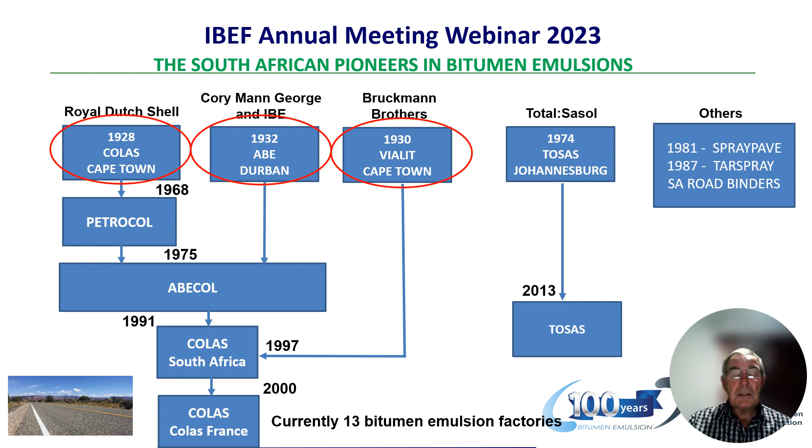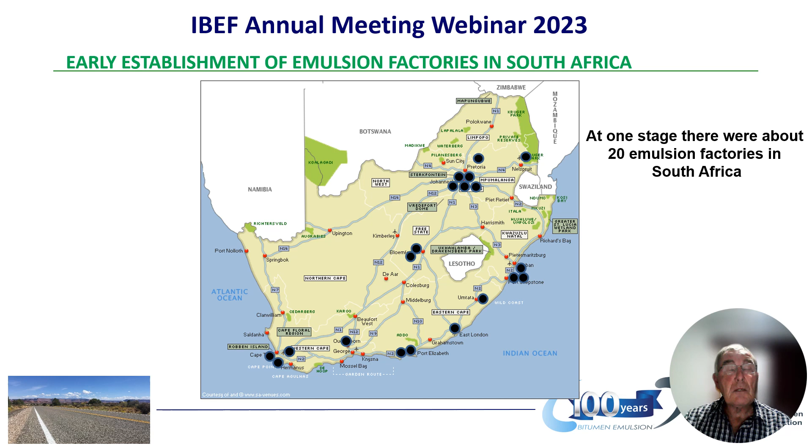After the first three factories were erected in Cape Town and Durban, a number of other factories were soon erected in the rest of the country. At one stage, there were about 20 emulsion factories in South Africa.

In the early days of emulsion manufacturing in South Africa, bitumen was imported in drums. The first crude oil refinery was only built in 1954 by Mobil in Durban. Shell and BP built a second refinery in Durban in 1962. This was followed by Caltex in Cape Town in 1966 and National Refineries, or NATREF, at Sasolburg near Johannesburg in 1971.

Unfortunately, the first two refineries ceased operations in the last three years. The refinery in Cape Town has also not produced any bitumen in the last number of years. The only supplier of bitumen currently in South Africa is thus NATREF. The country is thus largely dependent on the importation of bitumen for its requirements.

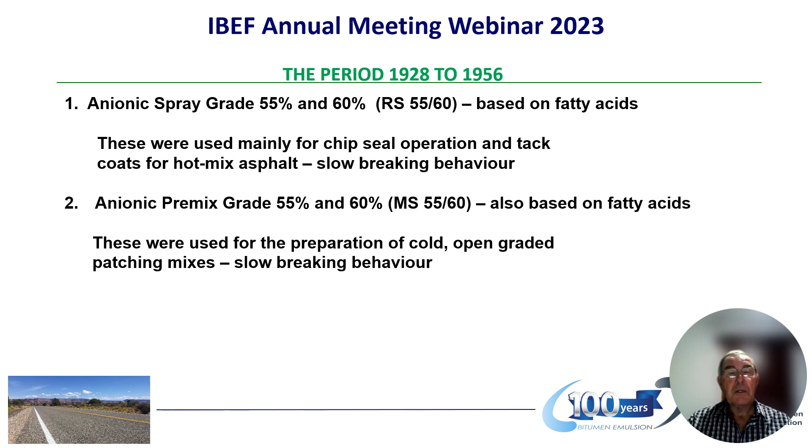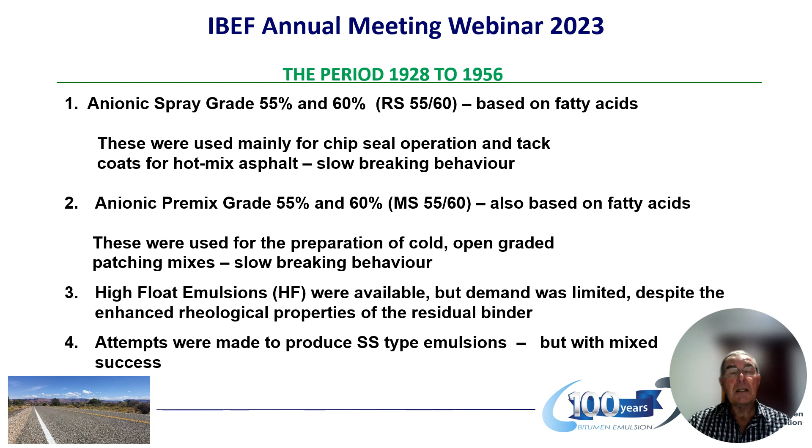The second grade that was produced was anionic premix grade, also called the MS grade, also based on long-chain fatty acids. These emulsions were used for preparation of cold, open-graded patching mixes, but unfortunately they were also slow breaking in behavior. High-float emulsions were available, but demand was very limited, despite the enhanced rheological properties of the residual binder. Various attempts were made in the early days to produce SS type emulsions, but with mixed success.

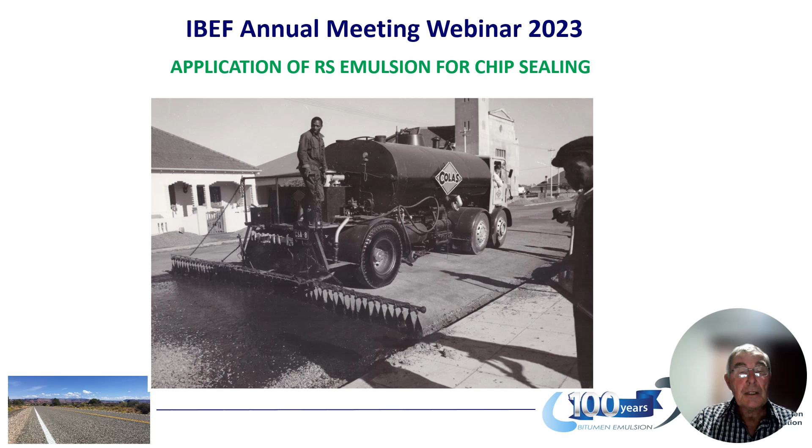A chip and spray operation taking place with the early anionic emulsions. Another old historical picture where RS emulsions are being sprayed for chip and spray application.

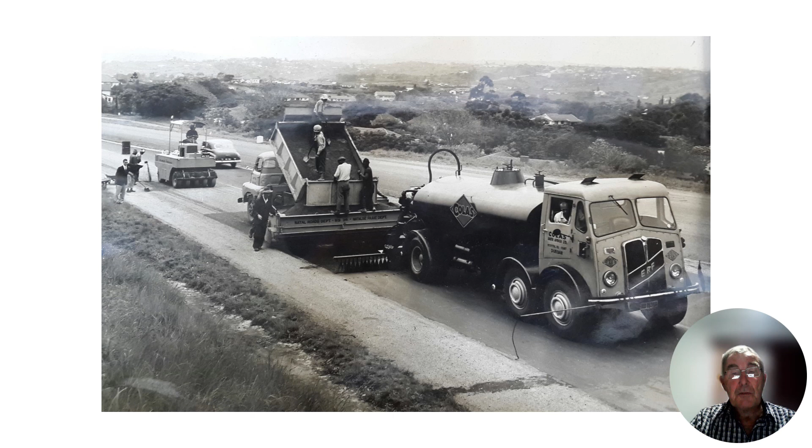These early anionic emulsions were not without their problems. The main problem was that it was slow setting during lower temperature conditions. Also poor adhesion with difficult aggregates such as quartzites and granites, especially during prolonged wet conditions. Also, it was difficult to dilute these emulsions with hard water, especially for fog spray applications, as it would block the tanks and the nozzles.

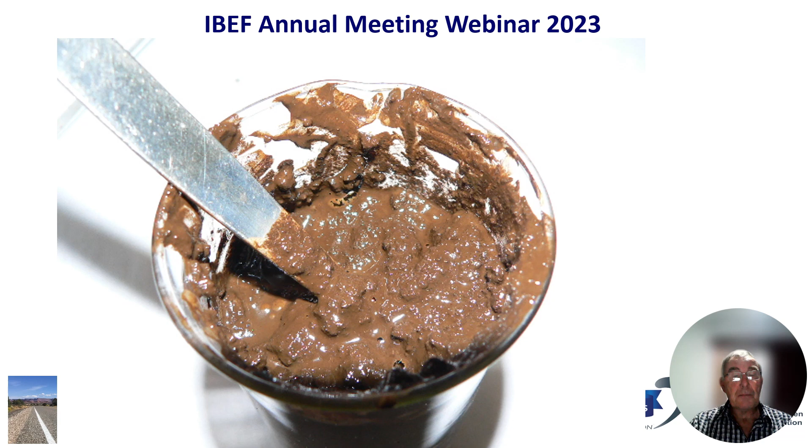It was also difficult to clean or rinse the equipment with hard water, as it would cause lumps. And these emulsions, of course, couldn't mix with fine-graded materials. This is a typical example of what happens if hard water is mixed with these early anionic emulsions.

The period 1956 to 1960 was indeed a landmark period for the emulsion industry, both here and abroad. Long-chain amines and diamines became available to the bitumen emulsion industry. It was now possible to produce CRS and CMS cationic emulsions, and that was the end of adhesion problems with difficult aggregates.

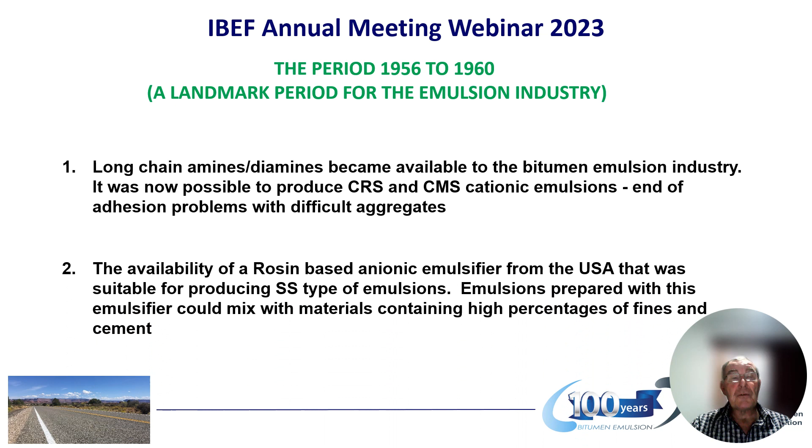Another breakthrough was the availability of a rosin-based anionic emulsifier from the USA that was suitable for producing SS type emulsions. Emulsions prepared with this emulsifier could mix with fine-graded materials and even with Portland cement. This was indeed the birth of the slurry era.

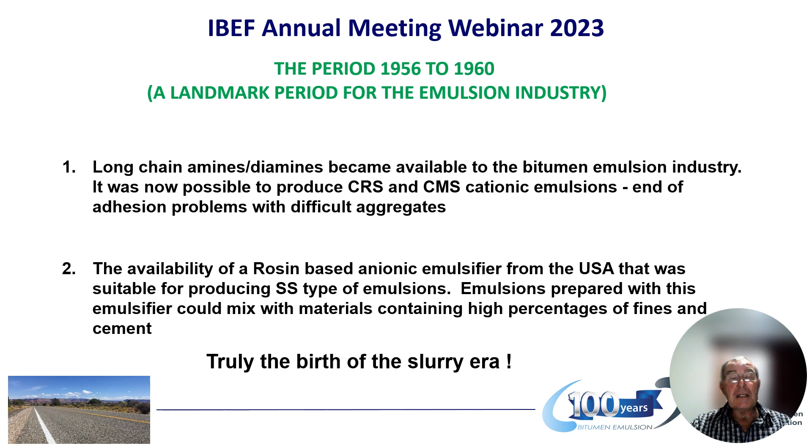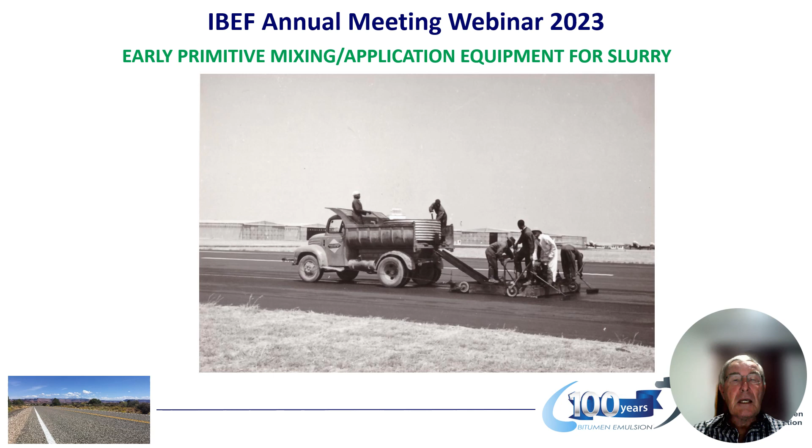Slurry soon became very popular. The early contractors were very innovative in the mixing and placing of this new product. This contractor was a bit more sophisticated, and he added a concrete mixer on the back of the truck.

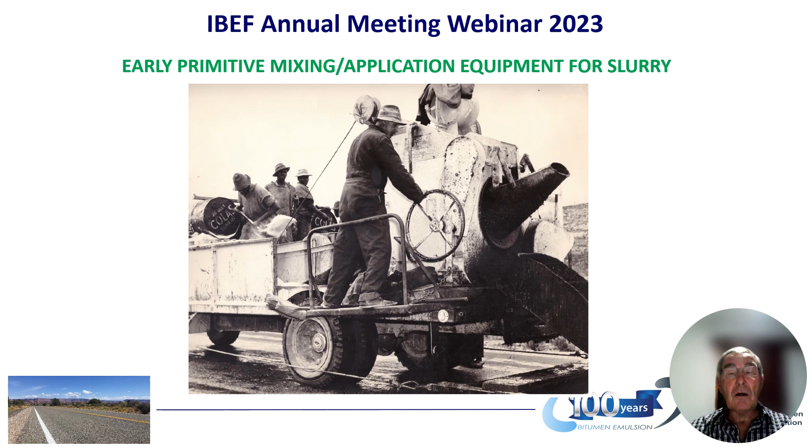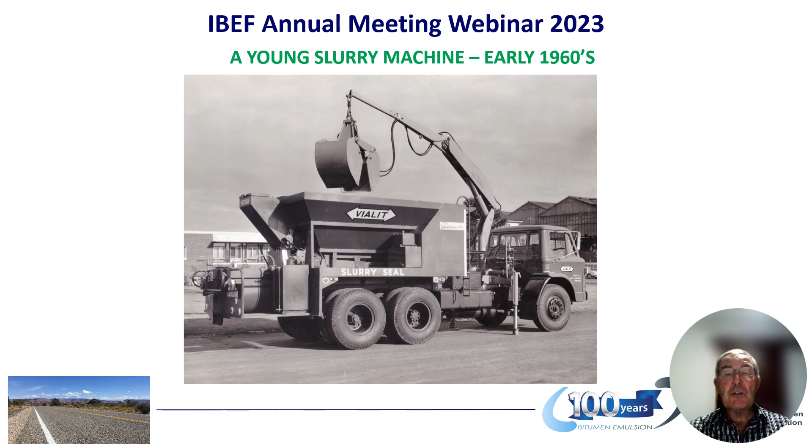Purpose-designed mix and lay slurry machines were soon designed overseas. This is one of the early young machines imported from the USA.

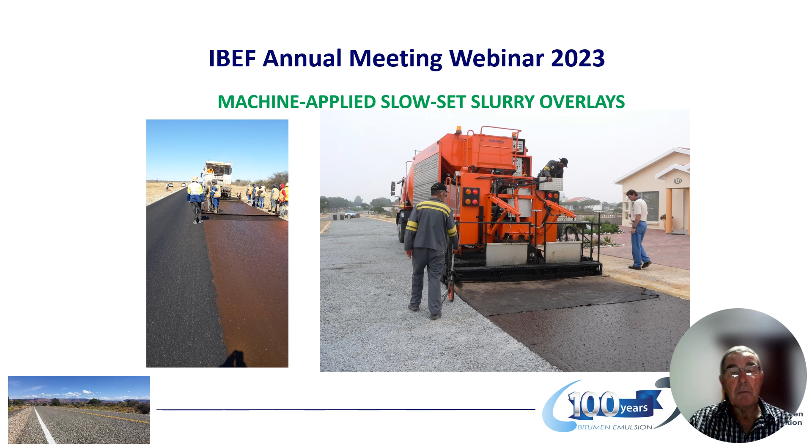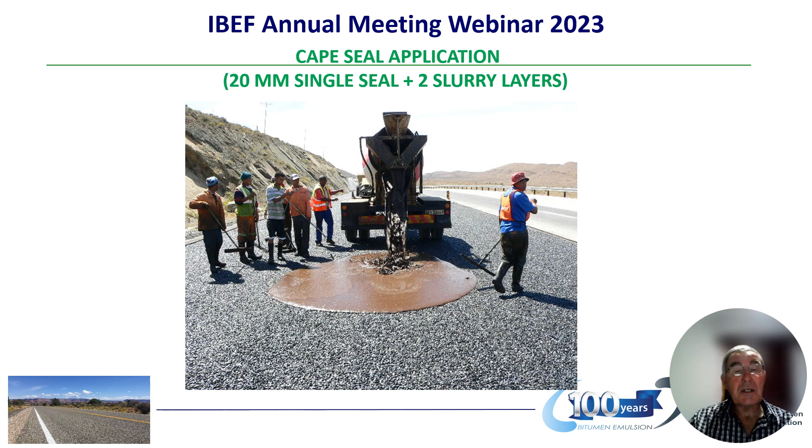There were a number of technologies that were made possible by the availability of the SS type of emulsion. These were slow set slurry overlays. On areas where traffic accommodation is not a major problem, this type of surfacing is still very popular. The Cape Seal application consists of a 20 mm single seal covered with two hand-applied slurry layers.

This is a picture of the first layer of slurry being applied on the 20 mm single seal.

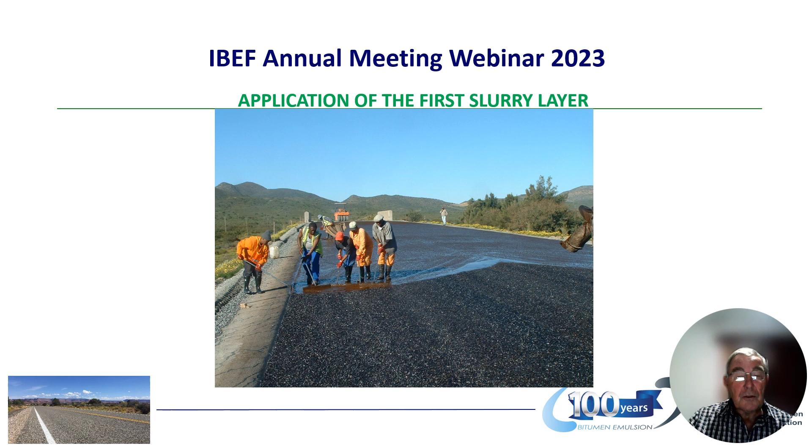In certain parts of our country, the ambient temperatures can at times rise to 40 degrees centigrade and more. Under these conditions, the mixing of slurry can become problematic. Sometimes premature breaking of the emulsion takes place in the concrete mixer, and then this phenomenon called balling occurs. It's quite an expensive occurrence.

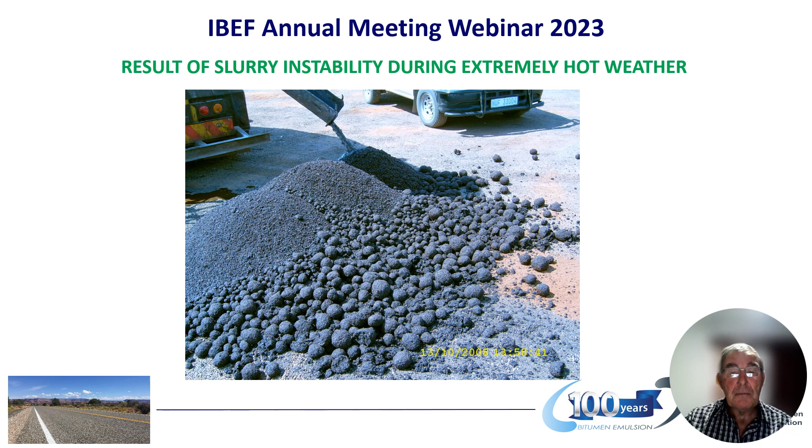It was soon realized that bitumen emulsion could be used to upgrade substandard base course materials to a higher level of performance. In the absence of sophisticated equipment to execute this task, conventional construction equipment was used. In later years, purpose-designed cold in situ recycling equipment became available, and it has subsequently become a very popular application in South Africa.

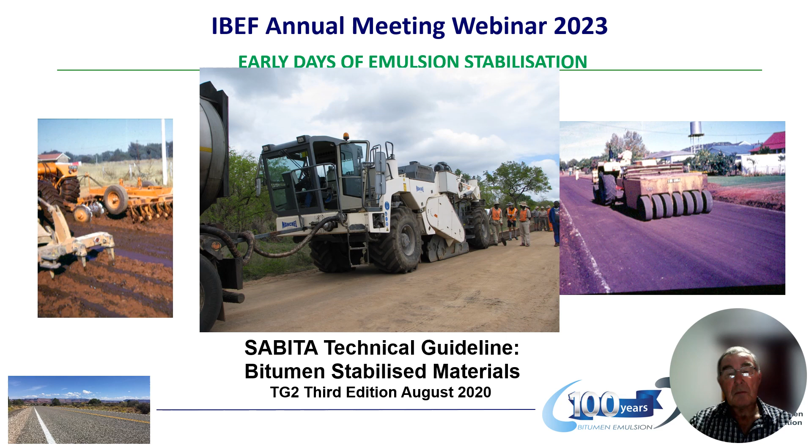Sabita has issued a technical guideline, TG2, called Bitumen Stabilized Materials, that covers the construction and design of this type of material.

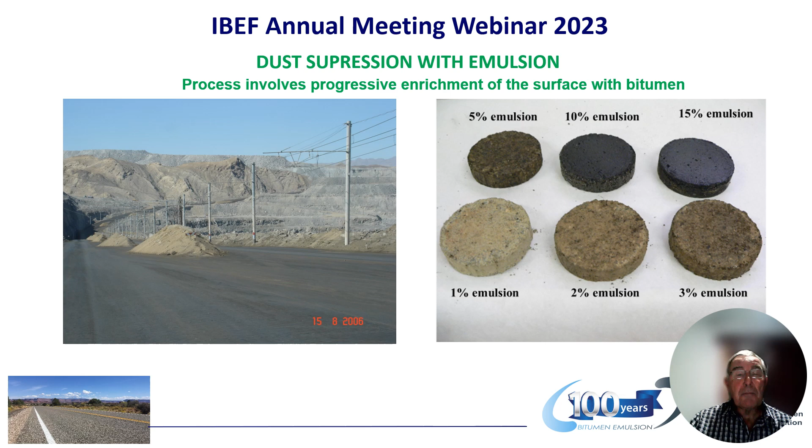Bitumen emulsions are used in both open cast mines and underground for the suppression of dust. The process involves progressive enrichment of the upper 50 mm of the surface with bitumen emulsion.

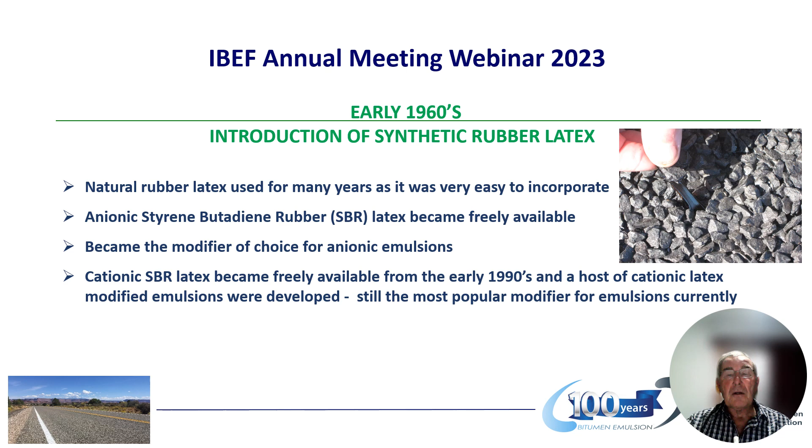Natural rubber latex was probably the first modifier used to modify these early anionic emulsions. Anionic styrene butadiene rubber, or SBR latex, became available in the early 1960s, and it soon became the modifier of choice for the modification of anionic emulsions. Cationic SBR latex became freely available from the early 1990s, and a host of cationic latex modified emulsions were developed. It is still the most popular modifier for cationic emulsions in South Africa.

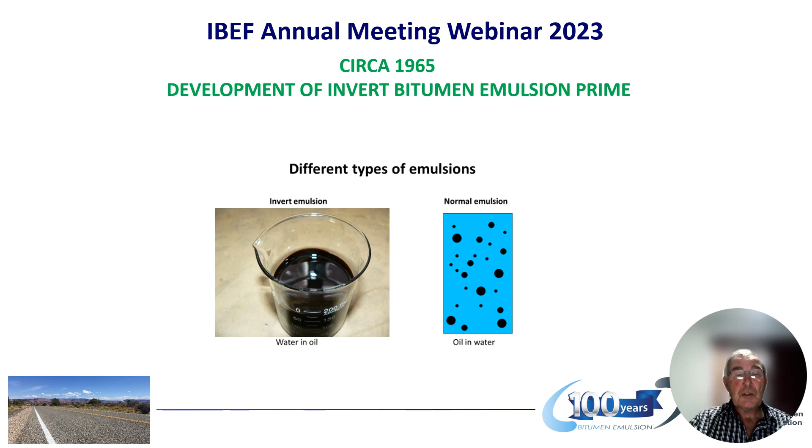Now, these primes were very, very popular for many years, but it was subsequently replaced by other products. You can see the picture on the left. A water in oil emulsion is black in appearance, where an oil in water emulsion is brown in appearance.

During 1977, the first CSS type of emulsions were manufactured in South Africa. These products were popular for approximately 10 years, but the demand for SS emulsions remained dominant. So the manufacture of CSS emulsions have now ceased completely, mainly due to cost implications.

Also in 1982, a license agreement was reached between Petrocol and Raschig in Germany for the application of the Ralumac microsurfacing in South Africa. Ralumac's been very successful in South Africa, and Sabita awarded an award for excellence to Petrocol in the late 1980s for bringing this technology to South Africa.

Other microsurfacing products have subsequently also entered the South African market. This is a picture of a microsurfacing unit brought in from Germany.

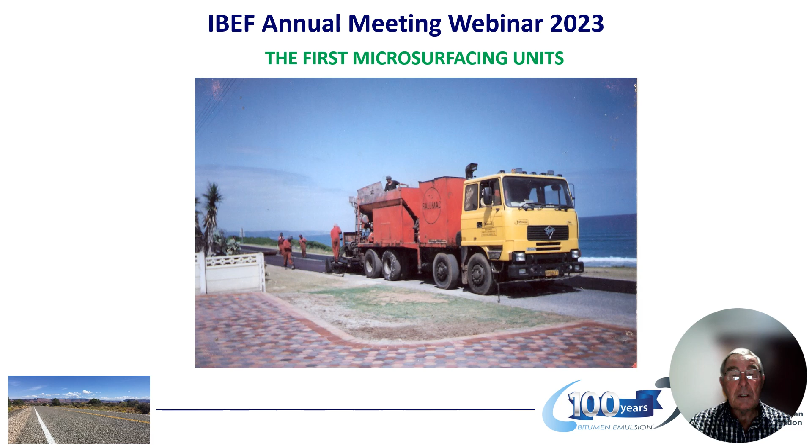A variation of the microsurfacing is rut filling, which plays a very important role in the maintenance of the South African road network.

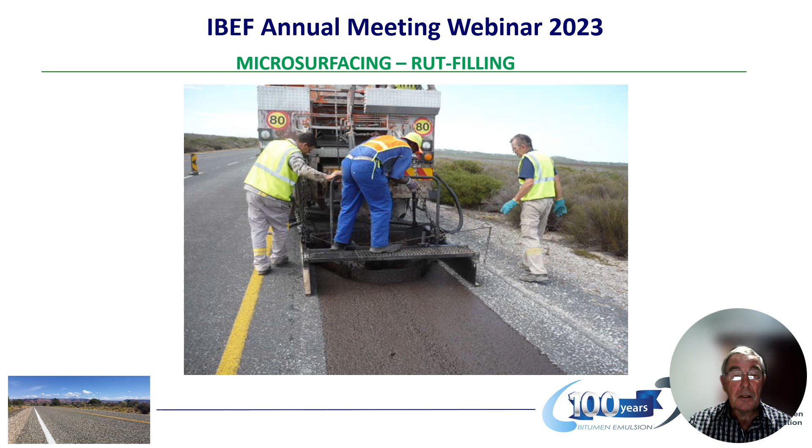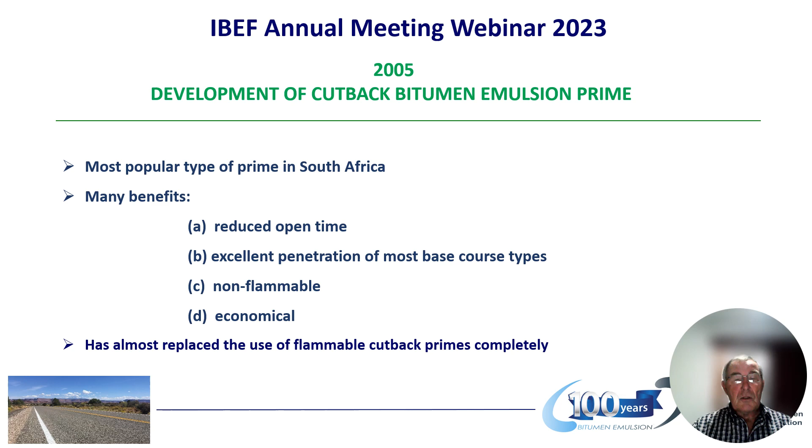This type of prime has virtually replaced the use of flammable cutback primes completely. Here is a picture of the cutback emulsion prime being applied on a runway near Johannesburg.

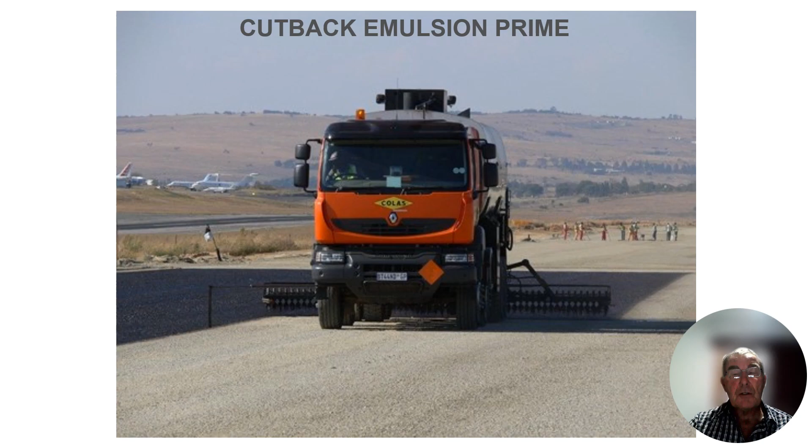During the period 2010 to 2020, three important technologies were introduced into the country. First of all, the production of the first SBS modified bitumen emulsions occurred, and also the first trackless tack emulsions and bond coats were manufactured. Very important also was the availability of a double spray bar system to accelerate the breaking of polymer modified cationic emulsions.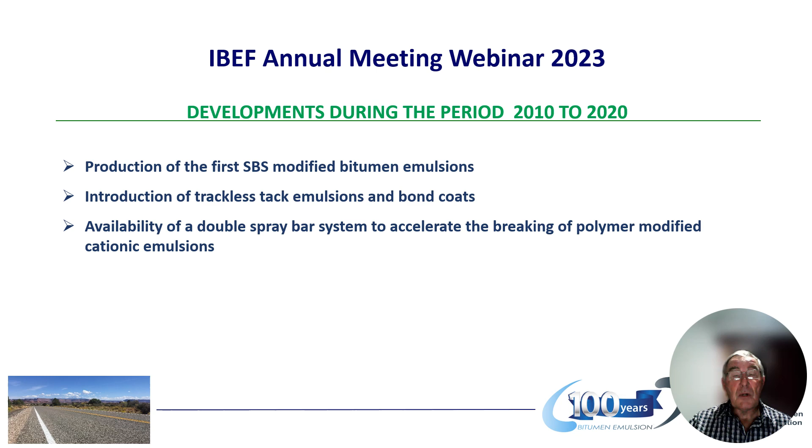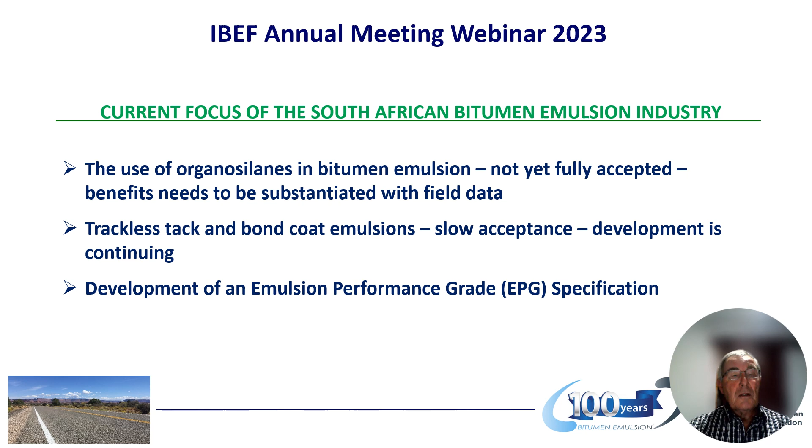The current focus of the South African bitumen emulsion industry is the use of organosilanes in bitumen emulsion. This technology is not yet fully accepted. The benefits still need to be substantiated with field data. Trackless tack and bond coat emulsions also see slow acceptance of this technology, but development is continuing. Under the auspices of Sabita, they're looking at the development of an emulsion performance grade specification.

If you look at the South African road network, we've got various categories of road, but what's important is that the total surfaced road network is about 156,000 kilometers, whereas the total gravel network is about 592,000 kilometers. What is important is that 78% of the roads that are surfaced are covered by seals.

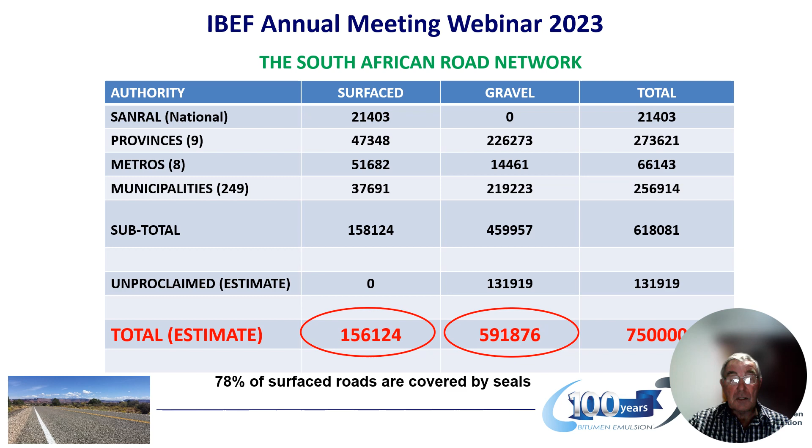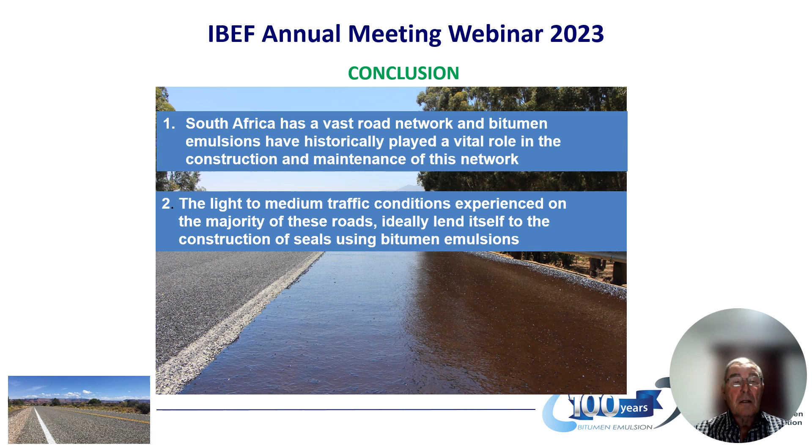In conclusion, South Africa has a vast road network, and bitumen emulsions have historically played a vital role in the construction and maintenance of this network. The light to medium traffic conditions experienced on the majority of these roads ideally lend themselves to the construction of seals using bitumen emulsions. All indications are that bitumen emulsions will continue to play a vital role in the future maintenance of the South African road network.